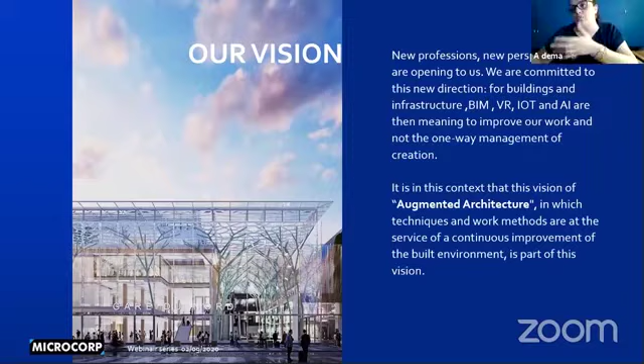So if we have to talk about the kind of project where we apply this vision, it's a lot of different projects, because this new way to think about architecture, engineering, infrastructure is not applied just to buildings, but can be applied to infrastructure up to the city. That's why, because we work in Europe, North Africa, Dubai, Russia, and China, we have a different scale of project. So BIM can be applied to all of these scales, but in a different way.

And before starting to apply that, and that will be the subject of my discussion with you today, I want to take a step back and show you something. Everybody, I think, will agree, when you want to build a house, maybe we will use the method on the left side of the screen and not the right side. I think everybody agrees. We start from the foundation to the top.

So if this process on the left is the right one, that means everybody thinks in the right direction to build buildings. But now, when we talk about information, when we talk about new technology, and when we talk about facility management, a lot of our clients would like us to start from the end to build all the process. So I want to share with you some experience, some reflection about the right way to build all the information until you can use that for facility management.

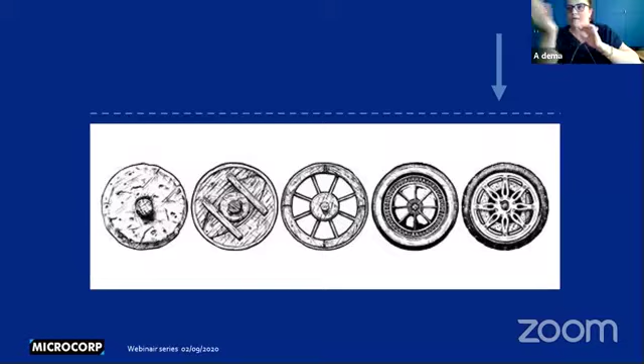Yeah, that was very interesting. What attracted me the most is the interactivity of everyone inside the orchestra. So from another point of view, if I may, Madam, does this actually induce ownership, meaning responsibility, from each of the group? Do you think your process helps them build up that sense of responsibility to fulfill their part as a team? Yeah. I think the biggest problem with change is the human, not the machine. Yes, yes. To be responsible for a new world. We can create what we want, so we have to be responsible for that.

Exactly. That's a very good insight about the new mindset that your company has adopted and implemented worldwide. And I can't imagine the challenges that you've been through doing that. Right? We love that. We love challenges. It's not easy all the time.

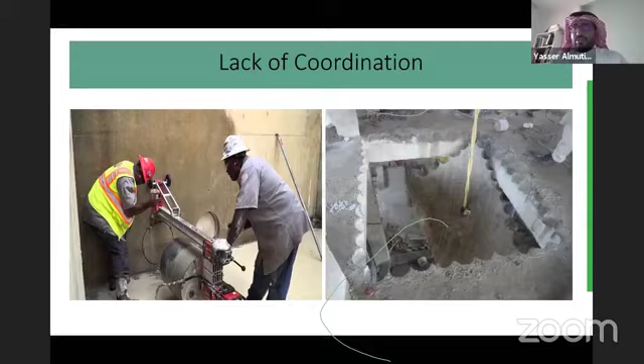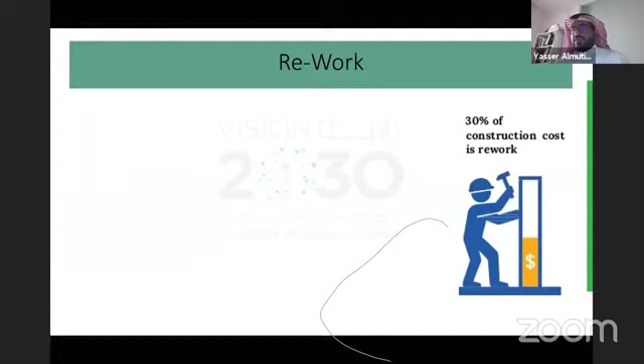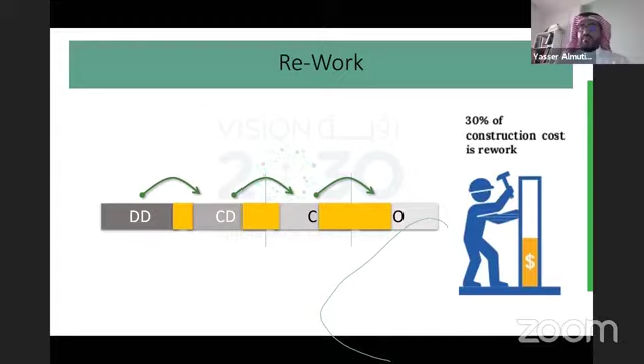If we talk about something else, for example rework, some of these issues were mentioned before: 30% of construction is rework. I'm giving an example of how it becomes rework. You know the 4 stages: design development, construction documents, construction, and operation. The yellow area here is the preparation area, where the second stage takes the documents from the previous stage and starts preparation before doing their job.

And this is growing data. The data from design development to construction documents is not as huge as from construction to operation; that's really huge data. This is the area where rework happens. Keep in mind, normally between construction documents and construction there is a bidding stage. This is where the contractor sometimes asks for extra money for that task.

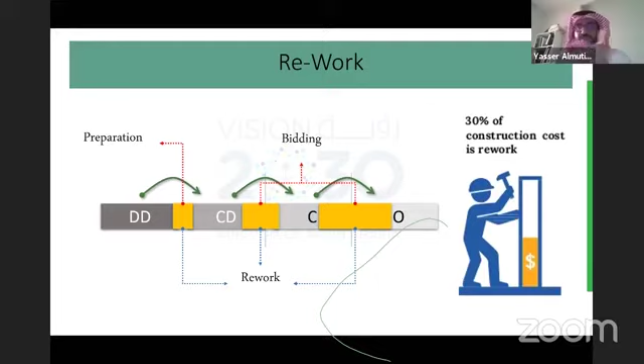And this is why 30% of the construction cost is rework. What's happening is that it will lead to delay and bad quality with high cost, impacting cost, time and quality. And we could add a fourth part, which is safety.

Now, people say that BIM is a solution for this case. First, what is BIM? Building information modeling has been defined in different ways. Some people say it's a technology, some say it's a process, and the majority say it's both.

Hold on, there's some sound.

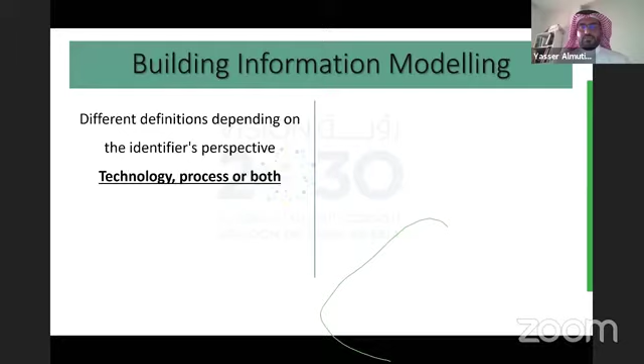But okay, in the end, BIM is actually not just a 3D CAD. We have to agree on that one, okay? And BIM is not just a new technology, or not even next generation. BIM is actually here and now, okay? And BIM is better information management. Okay, we have to think about that one.

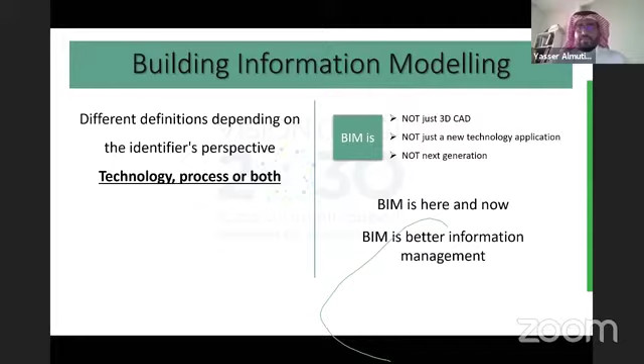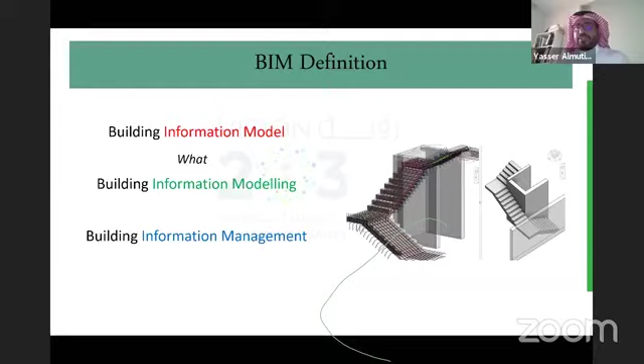To better define building information modeling, we have 3 different terms. I'm talking about building information model, building information modeling, and building information management. I'm going to give a brief of the difference between them. Building information model is what we're actually going to produce. Is it a structure model? Is it an architecture model?

And modeling is about how we're going to do that. And if we talk about management, now we are talking about the process: who's going to do it, when we're going to actually receive it, and the way of doing that as a process.

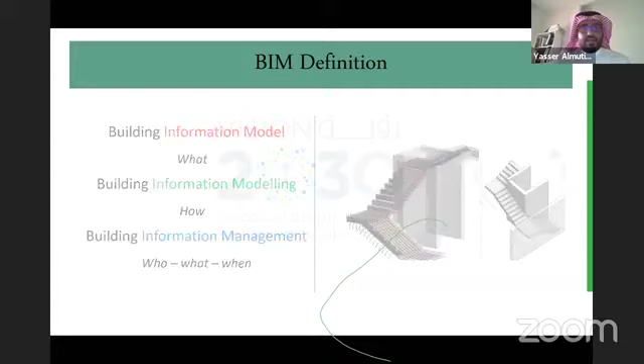We're going to speak about the definition of BIM in ISO 19650, which was released 2 years ago. They say it is the use of a shared digital representation of a built asset to facilitate design, construction and operation processes to form a reliable basis for decisions. This definition was mentioned in two different ISO papers. The first one was in 29481, in 2016, and the BIM ISO, which is 19650.

Now we're going to speak about the benefits of BIM. We have seen that we have different definitions, but in the end, BIM is better information management. We have a lot of resources presenting the benefits of BIM. You can Google BIM benefits, and you're going to get a lot of pictures similar to this one. I'm going to summarize that in 5 points: reducing cost, reducing carbon dioxide, improving facility management, improving quality, and saving time.

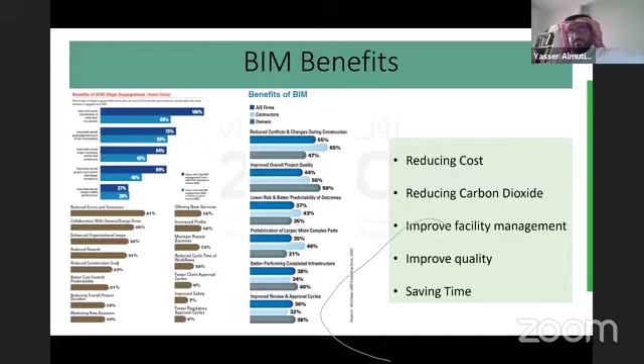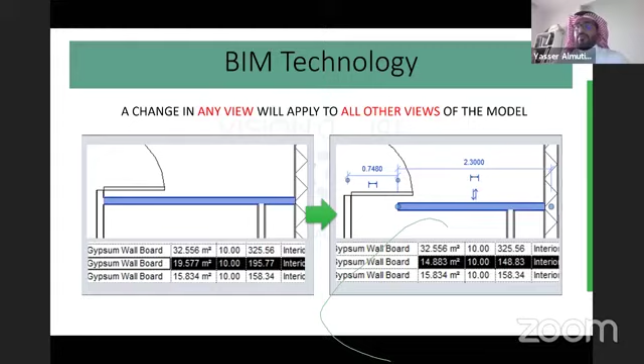What about the technology? One of the benefits of BIM on the technology side: this is from Revit, where the parameters are linked with the schedule. You can select the wall and see it on the schedule. And when you change the wall, its location, its sizes, anything you want, it will reflect on the schedule directly. We don't need to add anything. In the end, a change in one view will apply to all other views, which saves time.

I did my PhD, which I finished in 2016. But in 2014, I sent a questionnaire in Saudi Arabia. The aim of that questionnaire was to see the awareness and implementation of BIM in Saudi Arabia. I asked them a direct question, whether they had heard about BIM or not. In general, 60% of the academics and professionals had heard about BIM.

And when I asked them about the implementation of BIM, I gave them 5 choices to choose from: if they haven't implemented it and are not considering it, if they haven't implemented it but are considering it, if it's partly implemented or fully implemented, and if they don't know at all.

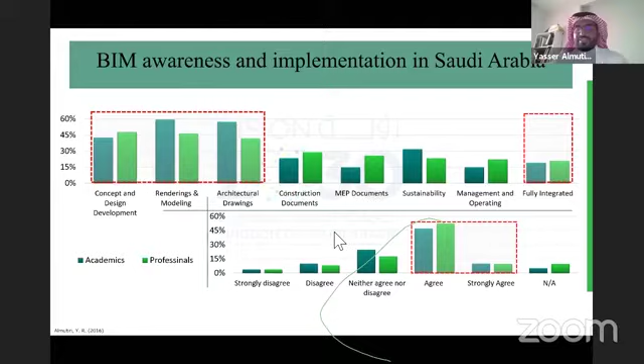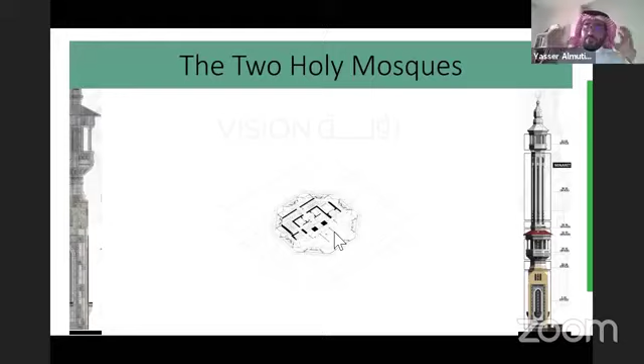I'm going to present some of the work on the Two Holy Mosques. It's not to present the idea of the Two Holy Mosques; it's implementing BIM in the Two Holy Mosques. This is a minaret on the mosque. SBG as a contractor got the 2D design, and from that they started to build the structure and the architecture, and they built the MEP.

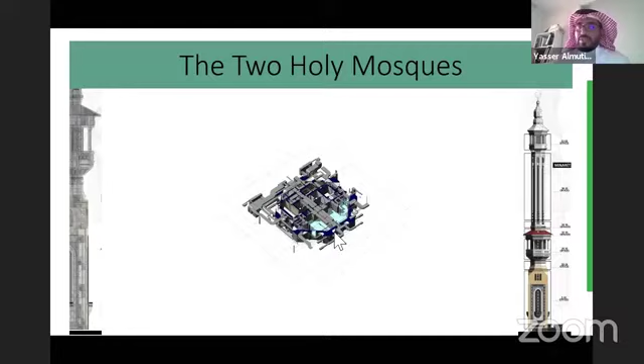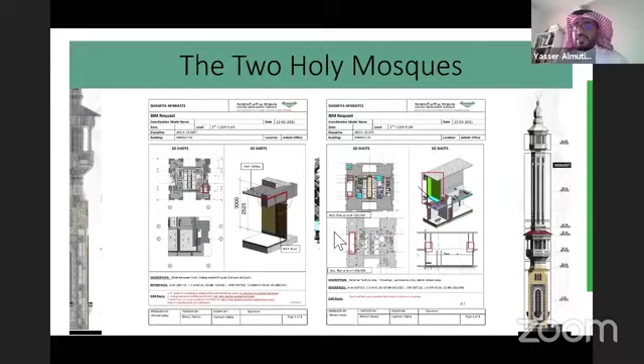In this case, everything is good. After that, we have the clash report. We handle the issues, and then we have this document showing the RFIs, the issues that happened, sent to design to solve them. This is the process. After this, the 2D drawings are extracted from it.

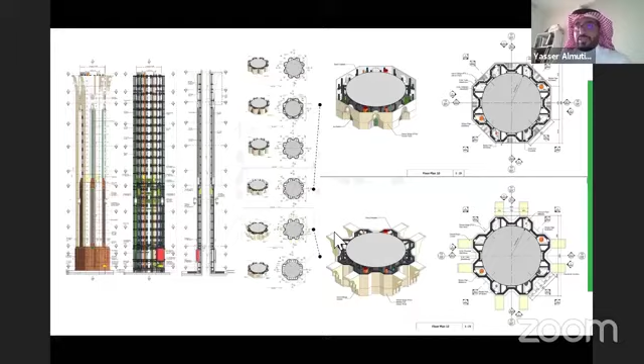In one of the projects, this is one of the columns in the Holy Mosque. I'm showing how useful these tools are for construction. Now we have a fully detailed, coordinated model where we can take a section anywhere in 3D.

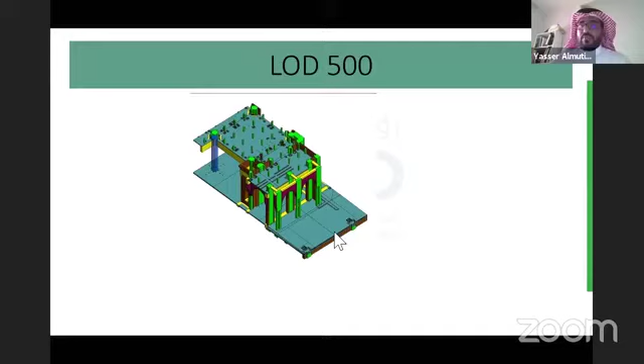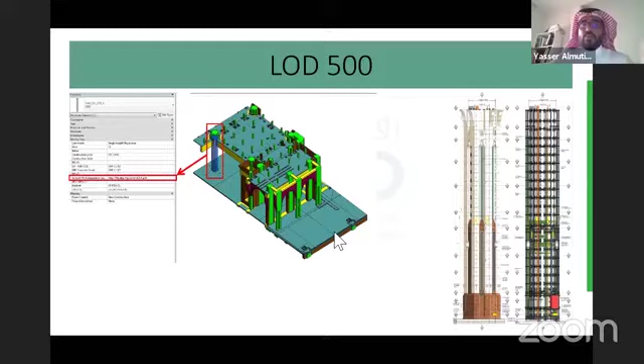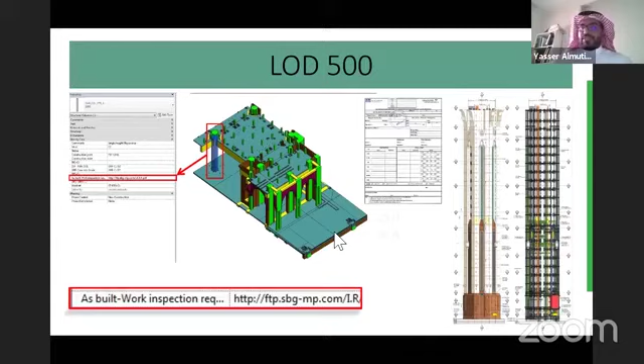After that, we move to LOD 500, where they have the model with the same column we saw on the previous slide, and for this column, in the properties in Revit, we link it with the work inspection request. We put that paper in and hold it as a document. This is what I'm saying: BIM is better information management.

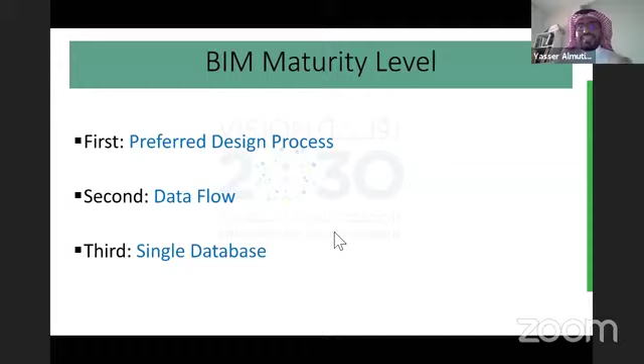Finally, in the last three slides, I'm going to speak about what we need to understand about BIM, which will help us implement it properly and get the benefit from it. There are three key factors we need to understand. First, the preferred design process. I'm sorry, the title is not that one, this is a different one. We need to know the preferred design process, the concept of the data flow, and the single database.

With the preferred design process, for the plan, design, construction, and operation, the four stages, we know the ability to change goes from left to right, because we cannot change once we are in construction. At that time, any change will cost money, and this is what actually happens in the traditional way. In the concept of BIM, we move that mountain to the design stage, to spend a lot of time designing there.

I have a phrase I sometimes use. I tell them: if you cannot build it in Revit, you cannot build it on location. Because we have people who say this is a problem, we cannot do it in Revit. I tell them if you cannot do it in Revit, that means you cannot do it on the site.

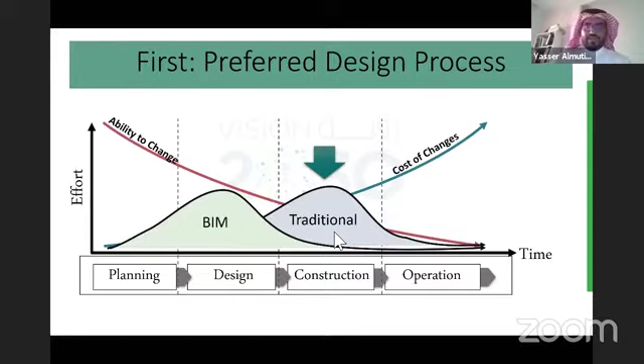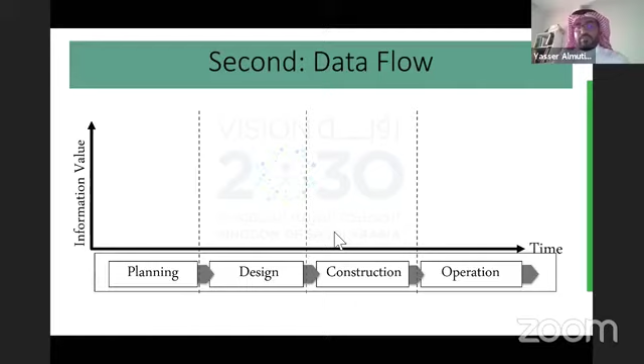The data flow, on the same graph: planning, design, construction, operation. The data is actually growing from stage to stage, starting with planning.

In the stage of the conceptual design, you have just only a sketch, and then in the design you have the dimensions and names of rooms and the type of furniture. In construction, you're going to add the installation date and the information of the work inspections. Another thing, in operation, you have the lifetime of the items. It's data. You have to understand it. If you cannot understand it, you cannot control it.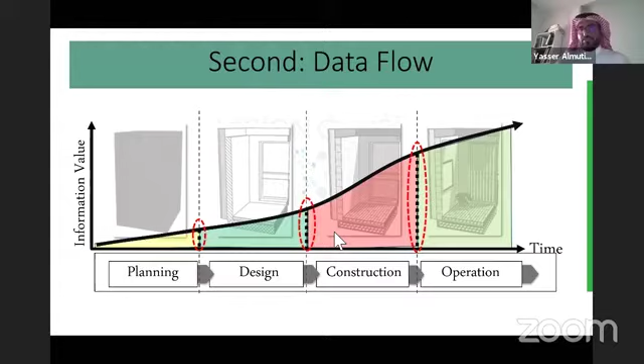The single database: to understand that one, I'm going to compare it with the traditional. In the traditional, what's actually happening is you send the data from the architecture team to the structure team to MEP, and then they receive it back again. They do 2D coordination and send it through bidding or whatever the process to construction. And the construction team have to contact them back again to do the rework we mentioned before. And facility management will even contact them again to upload the data.

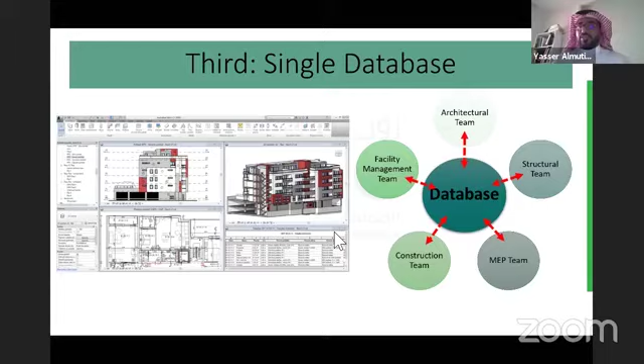Now we have at least three different central data. With the concept of BIM, we have a central database, and all of them link to that one. This is a conceptual BIM roadmap, technology roadmap. I developed that one. It's just only a conceptual.

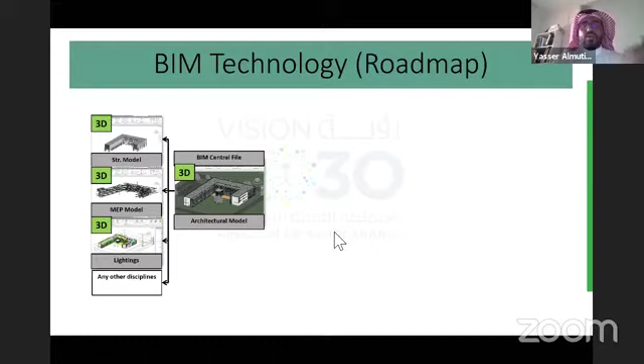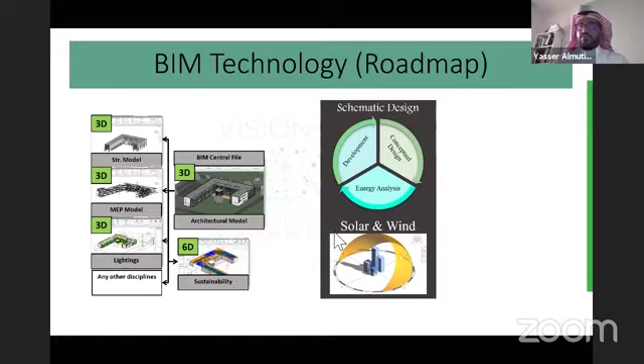If we have a central model, an architectural model, we share it with the structural, with MEP, with the lighting, with other disciplines, and we could even share it with sustainability, where they can start from schematic design to do the conceptual design, the analysis, and the development. Then, if it's approved, in the second stage, the design development, they're going to do the same things with the thermal and the lighting.

After doing that, we have the stage of 3D coordination, where they're going to figure out the clashes and send the report to the team to study it, using Navisworks, using BIMcollab. A lot of software can help with this technology or with these clashes.

Just imagine, because we have this kind of issue with the architecture, the blockwork. When you build the wall, they said we could demolish some part of that wall to do the ducts and the pipes. It's a site issue. This is waste material, and we can actually reduce that waste material from the design stage.

After we have a zero clash model with no clashes, we could extract the model, extract the 2D drawings, shop drawings, and the schedule, and then send it to the 4D plan, where we start to simulate it for the construction.

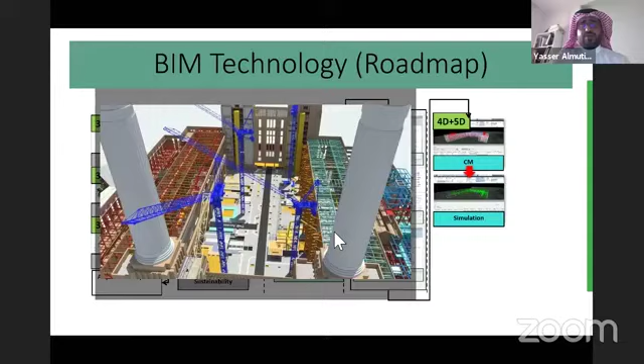In 2011, the UK announced that in 2016 BIM will be mandatory for all the public projects. What actually happened in 2013 and 2014 is the government stated that they had already saved more than 800 million pounds, just in the stage before they reached 2016.

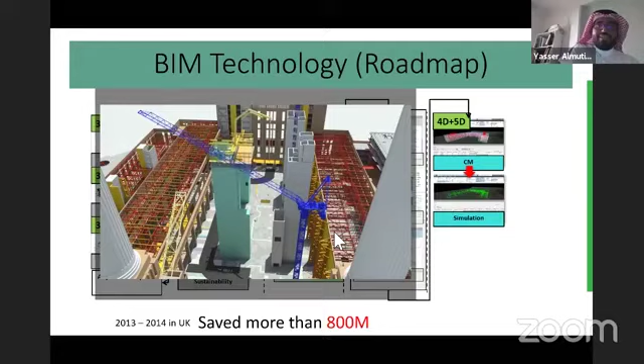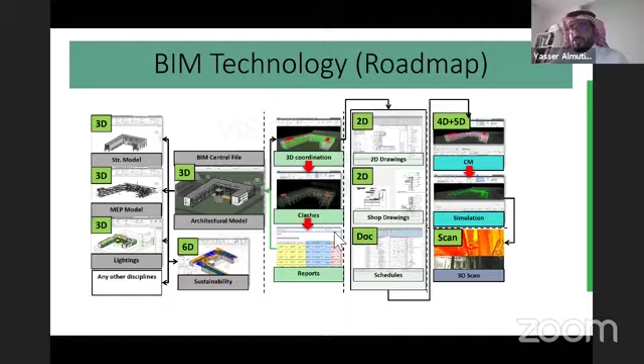During the construction, we have a technology called 3D scan. I think most of you are familiar with the 3D scan and its use. We use it in SPG, and it's really useful. For example, we had this situation. This is a cable tray. The design is in blue color, where the cable tray moves up about 1 meter and goes back again. But with the red one, what actually happened is the subcontractor installed it as one line.

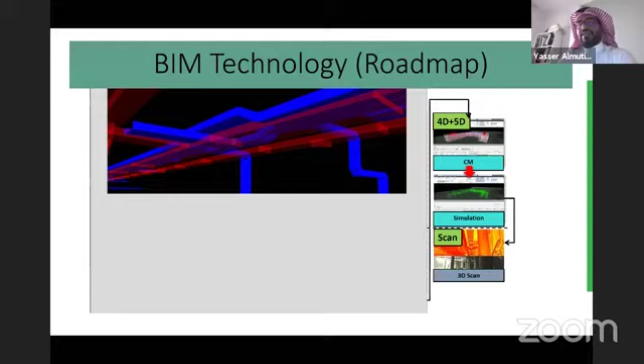I'm talking about this area. I don't know if you can see the mouse or not. What actually happened is just only one line. But when we did the laser scan and put it on the model, this is what's showing here. We did that because of the pipes. Now we ask the subcontractor to fix that again, because the cable tray is underneath the pipes. This is just a picture of how complicated the systems are.

And that's what I'm saying: if you cannot do it in Revit, if you cannot do it in BIM, you cannot do it in real life.

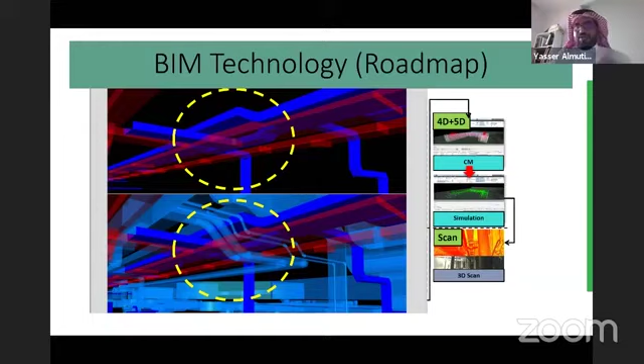Thank you, Dr. Yasser. I'd like to agree with you. If you cannot do it in BIM, you cannot do it physically. That is the mindset we need to go forward with. If not, people will not value BIM as it should be. That is a very good point.

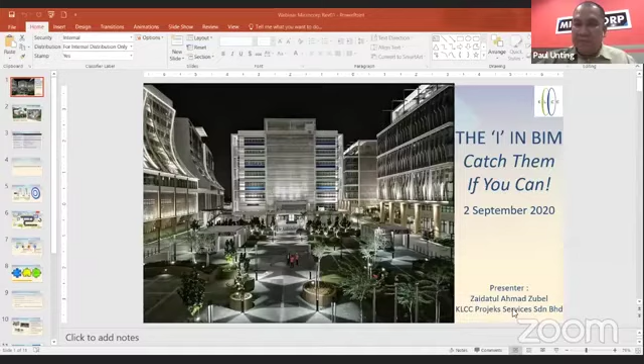My name is Zaidatul Ahmad Zubel from KLCC Projeks Services Sdn Bhd. I believe some of you outside Malaysia or even in Malaysia are not familiar with what KLCC Project is all about. KLCC Project is actually providing consultancy services for project management. We manage a project from inception, procurement, implementation, construction, and project closure. And also we manage the performance of the consultant and contractor on behalf of the client.

Our renowned project is actually KLCC Tower and all the development in KLCC Precinct, as well as Putrajaya, the Federal Government Administrative City. We manage the government buildings, the residential, the infras, and all the commercial buildings. As for my background, I am a civil engineer. I don't have any PhD like Dr. Yasser or Madam Annalisa.

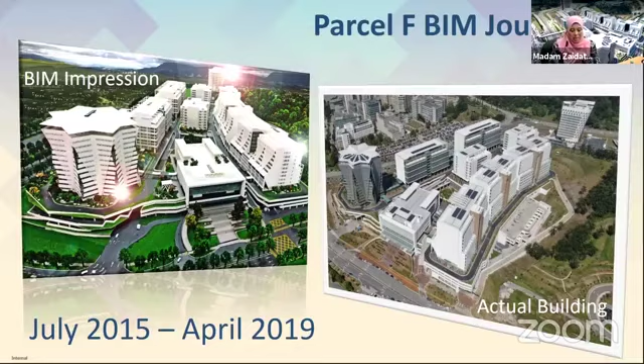Okay, go back to the Parcel F. On the left side of the screen is the BIM impression, actually a BIM model that we have done. And on the right side is the actual building of Parcel F. Parcel F is a government building development in Putrajaya. The site area is about 33.4 acres. The gross built-up area is 4.8 million square feet. Gross floor area is 2.4 million square feet. It is 10 blocks, consisting of 9 office towers and 1 shared facility. The parking podium is 2 to 3 stories, the shared facility building 4 stories, and the 9 office towers range from 4 to 13 stories.

BIM implementation for that project is from 3D, LOD 300 for design and coordination, up to 7D, FM. When I was assigned to implement BIM in this project, it was a big challenge to me, because I had never gone through the experience. I had to make it happen. So I think the I in the title of this webinar, for me, is innovative. I have to have an innovative idea, innovative methodology, how to make it happen, how to produce the result. And of course, like Dr. Yasser said, I is information. I believe that information can make people very powerful.

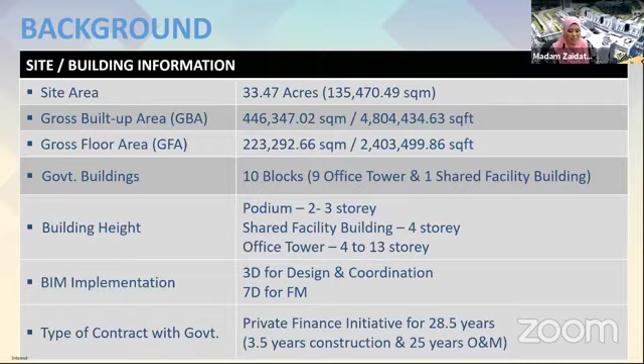Information is power. Okay, the type of contract for this project with the government is PFI, Private Finance Initiative, for 28.5 years: 3.5 years construction and 25 years for operation and maintenance. How did we implement BIM in Parcel F? BIM was quite a scary word to me earlier in 2013, but after attending all the trainings and workshops, I understood what BIM is all about.

So we were so lucky, me and my team, at that point of time, I have to mention their names, Pondasila and Hussein. We met one of the officers in CIDB, and he trained us, educated us, guided us, and advised us about BIM. So with that understanding, in order to make it successful in Parcel F, I crafted the 5 objectives of BIM in Parcel F.

First, because I believe if I manage to achieve all these 5 objectives, I manage to deliver the result of BIM implementation successfully in Parcel F. First is project visualization prior to actual construction. I have to make sure people can visualize in 3D the building in Parcel F. And also I have to carry out clash analysis and coordination workshops in order to ensure all the clashes can be resolved. And when the construction happens on site, it must be clash free.

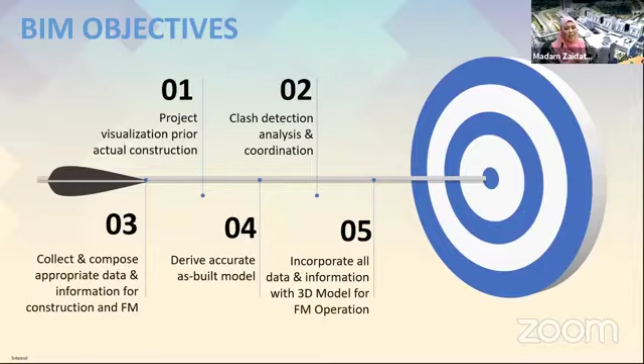And number 4, I have to derive the as-built model. It must be correct. The model and the site must tally. It's good for the operation after we complete the construction. And also we incorporate all the data and information with the 3D model for FM operation. I believe with my team, if I am able to achieve all these BIM objectives, we will be able to deliver BIM implementation in Parcel F successfully. Okay, this is the roadmap of our BIM journey in Parcel F.

If you can see the 01, which is in 2013, as I mentioned just now, I acquired all the BIM knowledge through attending trainings and workshops. And in 2014, we had to start to tender the project. Once I understood, I had the BIM objectives, which I have deliberated just now, which helped me to craft the specification and requirements of BIM implementation in the tender for the contractor to carry out their work. And in 2015, we issued the LOA to the successful contractor, which is Saudi Construction Sdn Berhad.

And then after the contractor was on board, when the reality came where we wanted to do the BIM implementation, me and my team were questioning ourselves, how do we manage and implement BIM? Because at that point of time, our knowledge about BIM was really at infancy stage. So after further deliberation, we concluded that we need to appoint a BIM checker consultant, for them to guide, to advise, and to educate us, and to ensure whatever we put inside the contract, we should be able to get it.

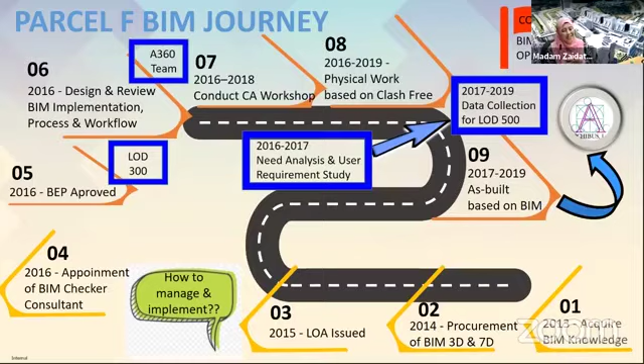Alhamdulillah. Okay. On top of that, I need to share also what is my process workflow for 3D. At that point of time, we don't have any reference because there is not much project implementing BIM in their project. So this process is created by me and our team in order to make sure the contractor follow.

First of all, contractors have to develop the detailed design, because for my project, BIM only come once the contractor on board. The BIM is not implemented during the design stage before the procurement. It's only happen when the contractor on board. Therefore, we have to be concurrent. Some of the team of the contractor have to do the detailed design because this project is design build, and then they do the detailed design.

And some of the team, they have to convert the 2D drawing to 3D models, which is step number 2. And step number 3, once all the 3D model completed, they have to conduct the clash analysis together with, of course, the PMT and consultant. And once all the clash analysis has been verified by the consultant, by the PMT, we have to print to the construction drawing for the subcon to carry out the work at site.

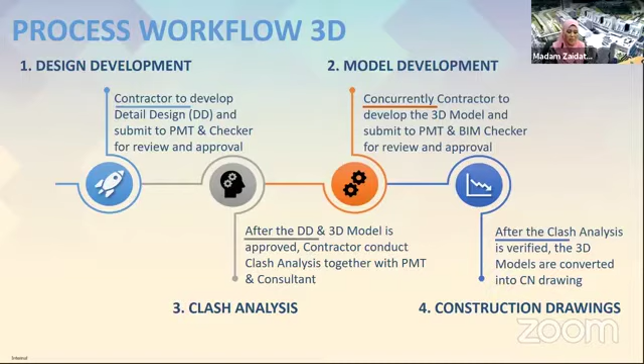And also, I need to share with everybody, at that point of time, in 2016, we have to also do inventing processes of clash analysis, because we need progress at site, and at the same time, we need BIM to be implemented. So we create 3 stages of clash analysis. Actually, if your project have BIM from the beginning, from the design stage before procurement, you don't have to have 3 stages of clash analysis.

But things will happen, and we cannot stop site from happening, and we also make sure that clash analysis is carried out. So we divide into 3 stages. The first stage is to resolve all clashes horizontally, which is slab. Where is the opening for M&E, where the drops required by the architect, we have to make sure that.

And the second stage of the clash analysis is to resolve all clashes vertically. The wall, we have to provide where is the opening for the windows, where is the opening for the doors, where the opening for the air conditioning, and so forth. So after that, the stage 3 is to resolve all clashes above the ceiling.

All the M&E piping in the ceiling have to be really studied, avoid all the clashes in order to ensure our reflected ceiling plan, RCP, is beautiful. We have to ensure where is the lighting, where is the speakers, where is the sprinkler, where is the aircon, and everything that required on the ceiling. And I have put note there, these stages are invented in order to hinder site delay.

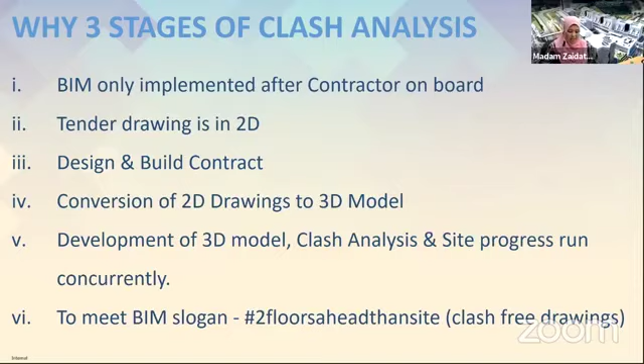Okay, we also conducted BIM field verification, whereby we need to ensure the models tally with the site. When do we do the BFV? We conduct prior to concreting. We need to ensure that the openings and the drop is available prior to wall construction. As I said before, the opening for doors, window, air conditioning is there.

After the installation of above ceiling works, to ensure that all the M&E piping inside the ceiling is properly arranged. I can invite everybody to my site to see all the M&E arrangement inside the ceiling. I can proudly say it's all in order. Thank you very much to my team. And we also conduct BFV after the ceiling is installed, to make sure the reflected ceiling plan is in order.

And we also conduct BFV before and after ID work, because there's a lot of clash between ID and M&E, and of course, in order to finalize our as-built, to ensure that the as-built drawing and site tally. Okay,

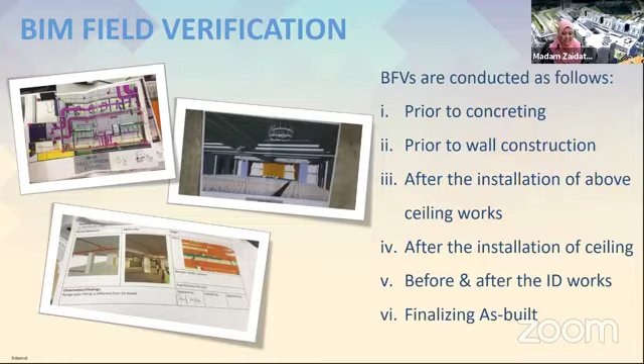after we've gone through all the 3D, this is where another assignment is to implement BIM FM. In the PFI agreement with the government, we need to deliver FM modules, which consist of space management, asset management, building operation management, and complaint management.

And all the requirements, like space management, we have to ensure the space inventory is available, view 2D and 3D space area, register and assign employee to space and division and/or department, view employee by building, floor, room, division; it's very detailed. And asset management, we have to ensure asset inventory and information, define the review asset and life cycle, and all the requirements for building operation, plan preventive and corrective maintenance, and everything is there. And also the complaint management on the help desk.

It's very challenging because all of us in construction are not familiar with facility management. We are so lucky having an FM specialist, Microcorp. They teach us, and we are so lucky to have a very committed consultant and contractor who are willing to work together to overcome all the challenges to ensure all these FM requirements

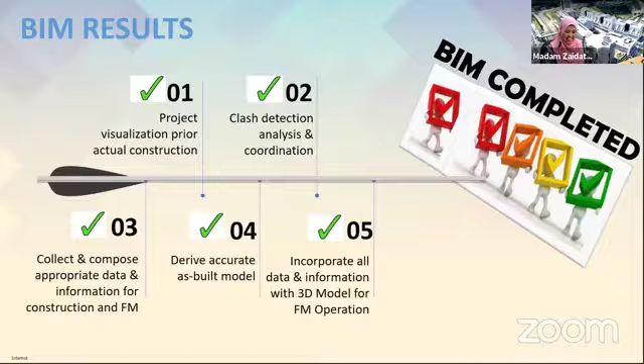Yeah. But when you were going through your presentation, there's one thing that came across my mind from Madam Zaidat. Right? I'm sure out of all these results, maybe another factor that we can look into is how many BIM-aware or BIM-competent people we have developed throughout the course of the project.

I'm sure there is a lot of knowledge, and these people came out on the better side in terms of competency and in terms of adaptability towards new technology in construction, and to follow through that into the operation side. Now that would be very interesting, wouldn't you say?

Yes, I'm happy to say that all the young guys who were already involved in BIM in PASF, whether their background is architectural, engineering, or even planning, are able to get a very good job now outside. And they are headhunted by other companies because of their BIM knowledge from PASF. I'm proud to see that.

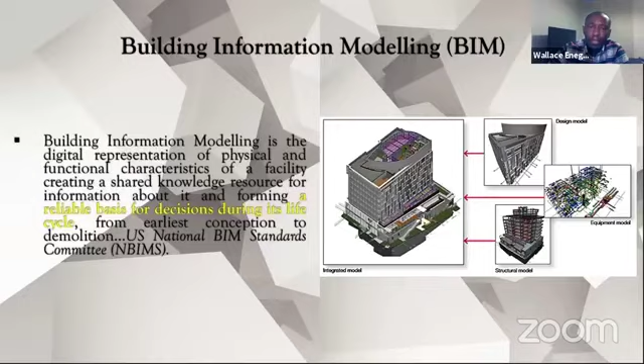So catching the I in BIM, it's not really far-fetched. The information really links to all your BIM objects. These are snapshots of basic BIM objects, which are the focus for facilities managers. Wear and tear to these objects forms the basis for facilities management, and the information about these objects is quite important for facilities management.

When we move on to a much more advanced I, this could mean a lot to various team members. Looking at this by what I do daily, I see components from which I look more towards construction sequencing and planning. But a couple of my colleagues, like Jacqueline McIntosh, will be looking at sustainable reuse of each component within this figure.

And some other parties will also have many other meanings to various objects within the BIM model. An earlier study which I read quite a few years ago, in terms of the I in BIM, was when fire responders use information to have quick access to the building. So when they receive a call, they can easily plot the directions using GIS mapping to the building. Within the building, they have access to the ingress and egress, and also the fire ratings of the doors and the easiest access point to the building. So this I, so to say, means a lot to different parties.

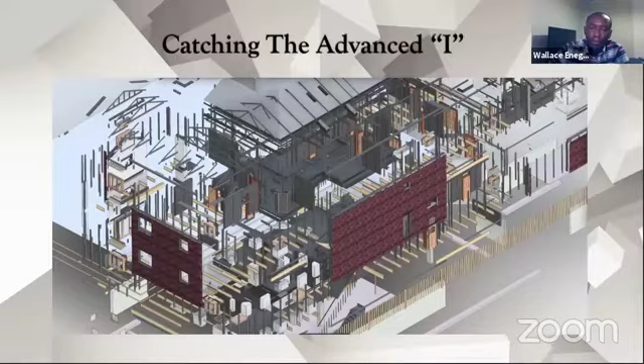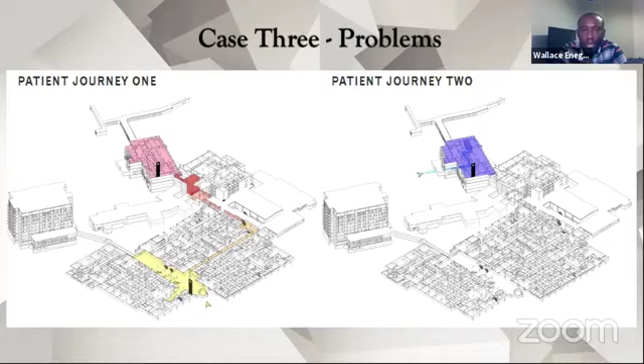Yeah. So we went on to do some of the BIM modeling, and we later went on to some other issues which they were facing. So this had to do with patient journey. So imagine you went into a hospital and you keep getting lost or asking for directions. So it's quite difficult to meet appointments. So we went in, we analyzed the signage, so signage was an issue, and also locations of the numbering systems. And so we started brainstorming on how we could get clients, patients to their appointments on time.

So this I did some work on with my colleagues up in IT. So we did a project in which we analyzed indoor navigation systems. So when you are going in for your appointments, once you step into the boundary of the property, an app kicks in and it's voice activated. So it's visually impaired friendly. So you can easily get to your appointments.

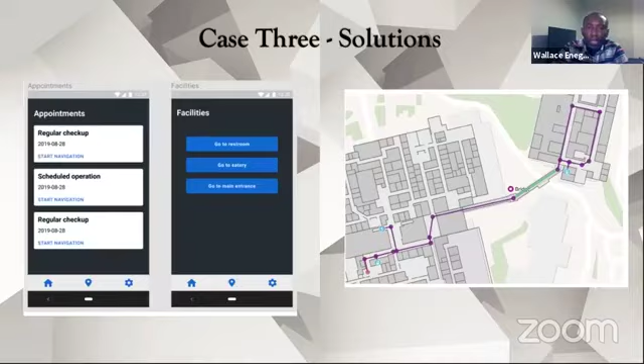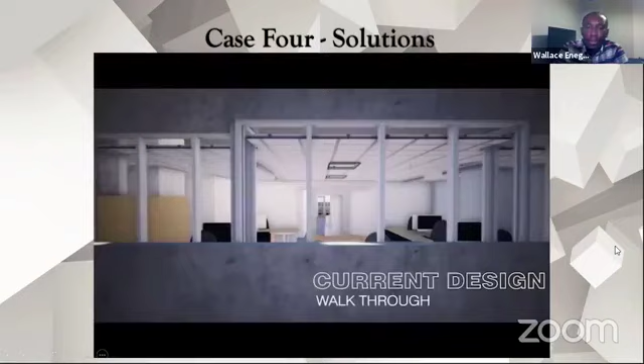All right, so some of this, the solution we came up with, I'll just play this video and just continue putting you through. So we had to go into virtual reality, building off the BIM model, so that both the occupants and the FM teams can really have that immersive experience. Yeah, so we gave them the VR headset, and they were able to get into the space and experience firsthand what we were proposing for them.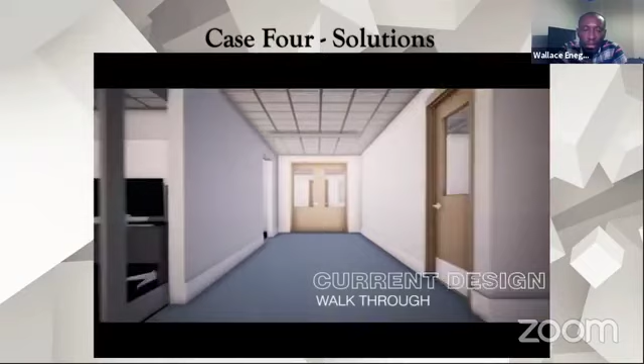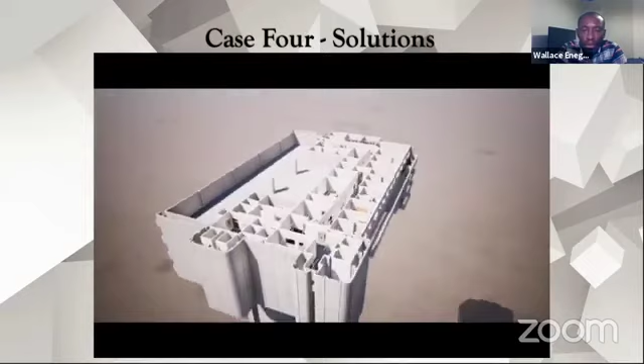So we got rid of all the interior partition walls and made it into a much more open space design. Then we also had to put in more storage spaces in terms of lockers, and also a much more activity-based working environment. So this is our new proposed solution. So it had private meeting rooms, much more flexible seating arrangements, and much more modern lighting, and we knocked down some of the windows towards the right there. So that's the floor plate.

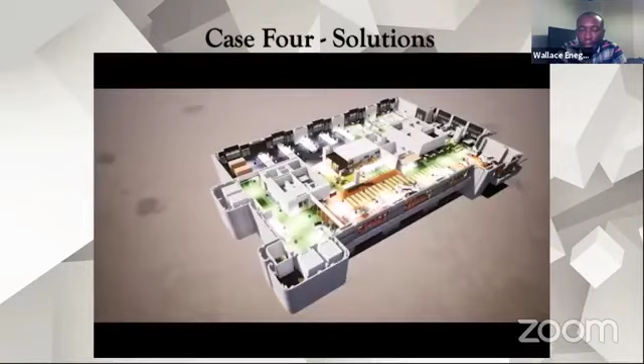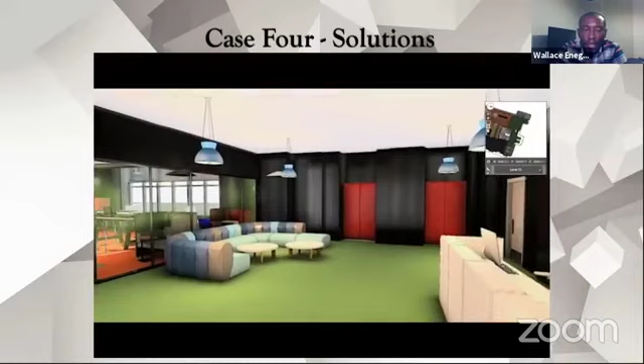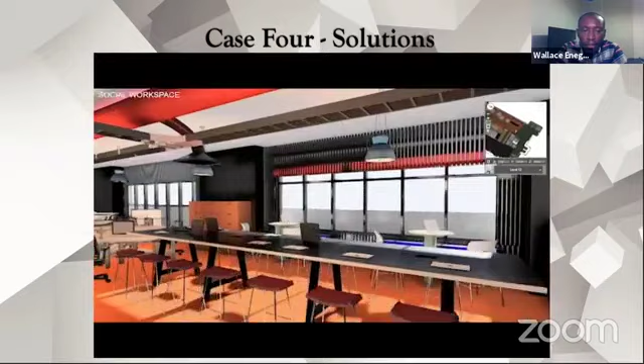So we use color coding to separate each work zone. And later on, you would see the central social space where you have the kitchen. So in the past, it was towards the edge of the building, but now we placed it somewhere central. So this forms, so to say, a gathering social space where workers can easily interact. So those are some of the diverse seating workspaces.

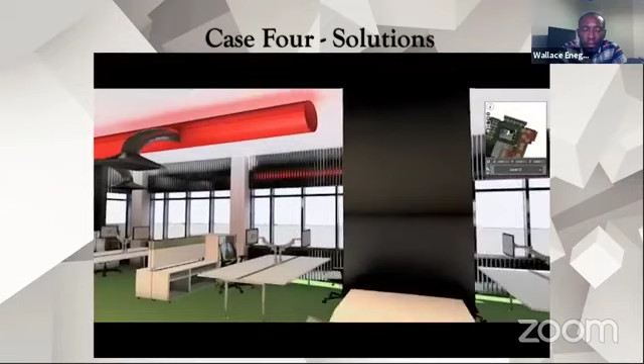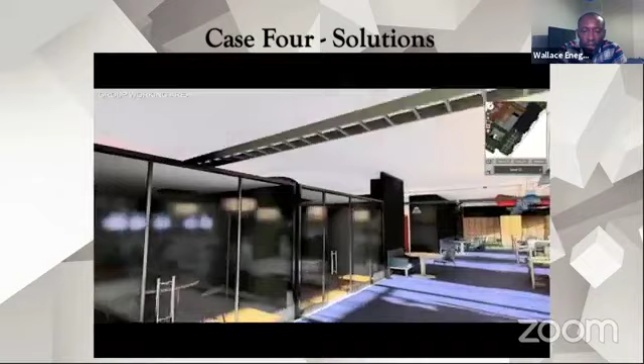So we also put in some flexible, much more modern electric tables. Yeah, so they are adjustable, so preventing workplace accidents. So you could actually have flexibility around your space. So those are the quiet meeting areas and conference rooms.

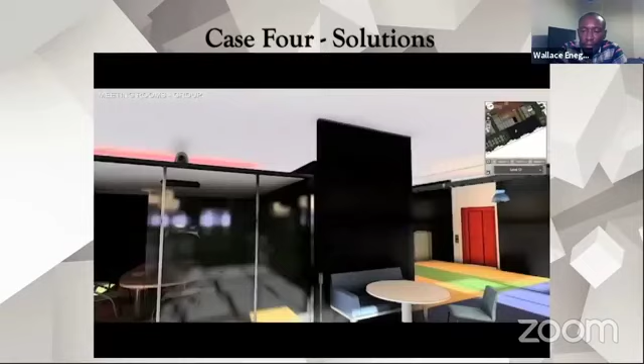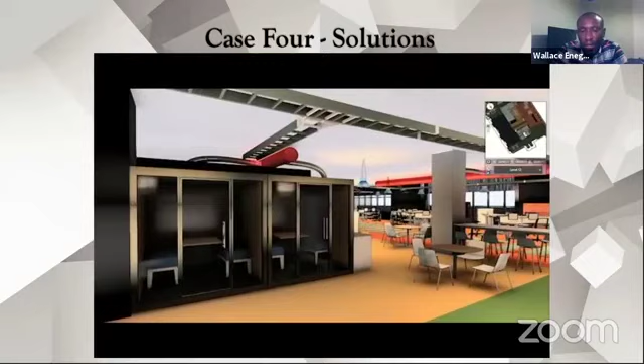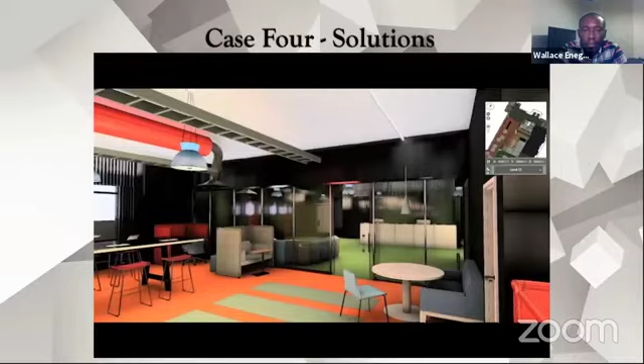Then you have your storage somewhere down the end of the floor plate, quite separated from other workspaces. Because we noticed lots of the workers really came in with lots of baggage and just kept them within their work area. So we wanted to really free those spaces around their workstations. All right. So I'll just move on to the next.

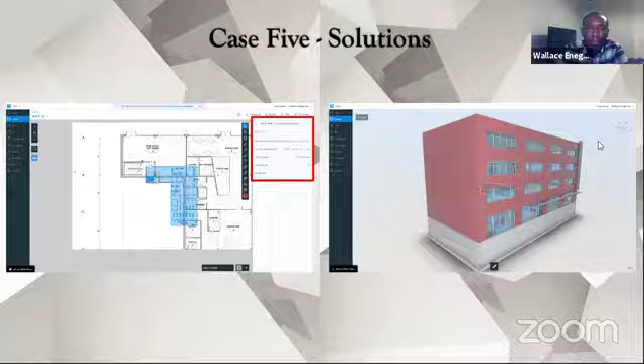All right, so just a quick summary. So I've covered the FM teams. They need to really see the value in the BIM information, and also the I needs to drive decision making, and academia is heavily engaged in I training. So thank you very much. So I'll take the questions after the session.

Thank you, Dr. Wallace. That is eye-opening, and my favorite part is about some works on old buildings. Now, I think we need to see more of that, and how that plays with current technologies and our ability to understand better in the effort to preserve older and maybe valuable buildings.